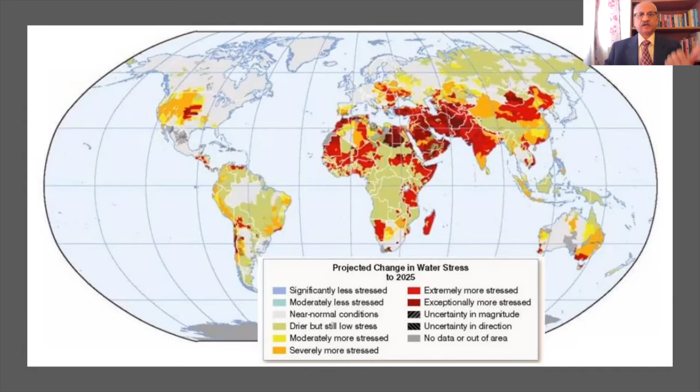Now, look at this picture. If you look at just 10 countries in the world, they account for 60% of the world population, and they don't have access to clean water. And now the biggest problem is going to be for India, especially the Indian subcontinent, for India, Pakistan, and other South Asian countries. So at the same time, if you look at the cities, the global cities which are facing this water shortage, you can see this started...

Once we identified the problem with Cape Town. So Cape Town was in the news a few years ago, and now there are other cities in the world which are also facing a similar situation, and unless and until we take some serious steps to address this, it is going to be a difficult situation. And one of the cities identified is also London.

So we need to address one of the areas where we can work, which is addressing this wastewater recycling for augmenting freshwater supply. Now, when it comes to wastewater recycling, we cannot ignore the energy water nexus.

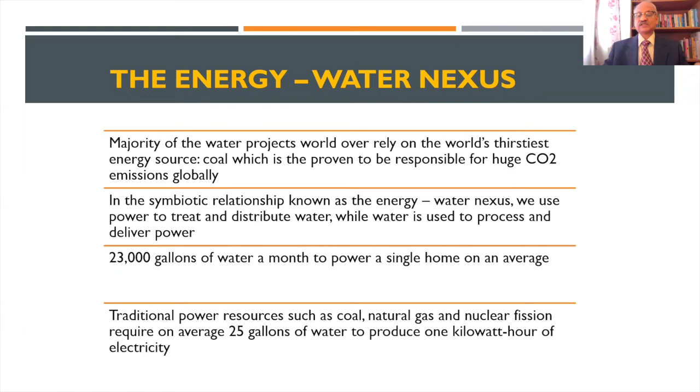Now the coal plants top the list, and they withdraw anywhere between 20 to 60 gallons of water per kilowatt hour. So the typical American home uses 900 kilowatt hours of electricity, which translates into nearly 23,000 gallons of water.

So it is time to look at the energy water nexus as well, because what is happening is the industries, especially the heavy industries like power stations, steel industries, and other large industries, mining industries especially, are competing for water with communities. So they are coming into conflict with the communities for accessing water. And at the same time, they are also causing heavy pollution of the wastewater they are generating, which is not treated to standards.

On the other hand, even though in Europe we have started the decommissioning of the coal-fired power plants, there is still an issue to be addressed there. So what we are doing is we are trying to repurpose the coal-fired power plants by switching over to gas-fired power plants or renewable energy power plants.

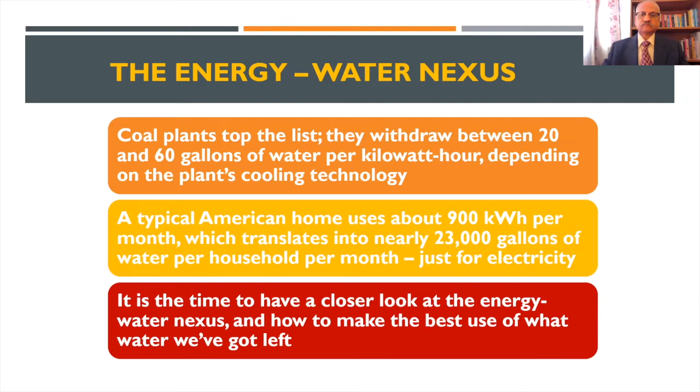But we are not addressing the pollution already caused by these coal-fired power plants, because they cause enormous damage to the environment over time. So look at this example of what these coal-fired power plants and coal mines are causing in developing countries.

I mean, the river is completely dead. It has no life at all. This was mainly caused because the state has an enormous number of coal mines, coal power stations, coal-fired power stations, as well as steel industries who are responsible for this pollution. And this is irreparable damage the industries have caused, and it is irreversible. It is going to take hundreds of years to restore this river.

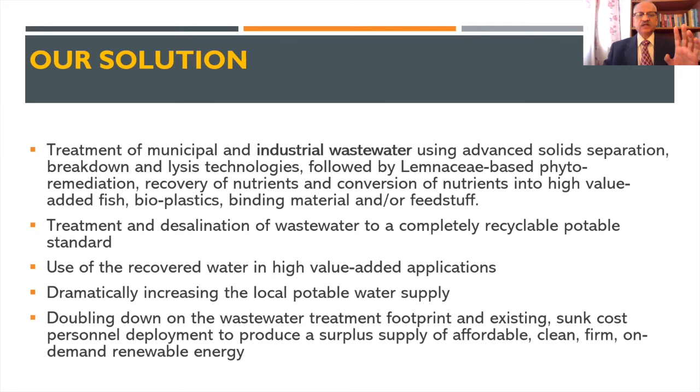It is nature-based. Now what are the problems we are addressing in our solution? If you look at this solution we are proposing, it follows the circular economy principles.

I can even say confidently that this solution is a typical example of circularity in water, which is very important. We address a number of problems: wastewater recycling for reuse, nutrient, energy, and water losses. We try to create long-term water security, food security and nutrition, prevention of water and soil pollution, and climate change mitigation solutions. If you look at the solution we are providing, it is not a simple wastewater recycling solution.

It is a wider climate change mitigation solution, because the plant, the Lemnaceae, which we are using, the vascular plant, is one of the fastest growing plants in the world. So in the process, it is sequestering enormous CO2. We are producing high quality superfood, we are producing renewable energy, and this solution recovers all the water for reuse. So it is basically a climate change mitigation solution, and not a wastewater recycling solution at all.

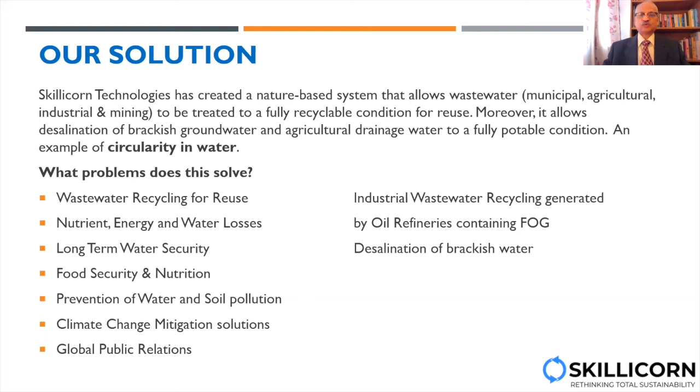We also desalinate the brackish water, as I will explain. Now, this is the plant. We think this is the plant for the future, because it can address a number of the challenges we are facing now. Its botanical name is Lemnaceae, and the common name is duckweed.

The duckweed is a common plant, and it is seen as a weed. In summer you can see it in Regent's Park or in Hyde Park, in the ponds there, in the water bodies there, flourishing. So this is available internationally, but this is one plant that has not been exploited by us.

They are small aquatic plants, floating aquatic plants, small in size, but they grow very rapidly. They grow twice in size within 24 to 72 hours under ideal conditions, so the biomass doubles in 2 days' time. And this plant contains leaves.

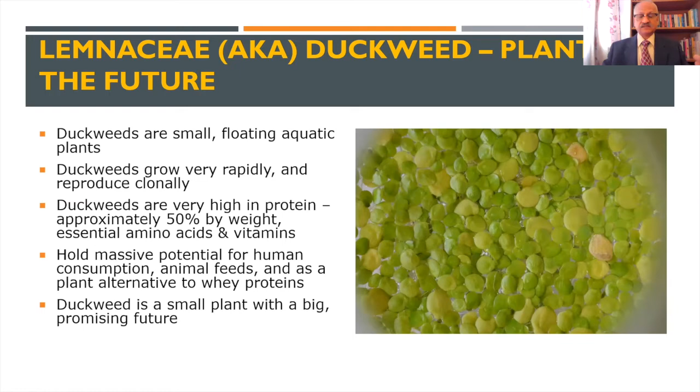They contain up to 50% protein by weight. There is no other plant source which can match Lemnaceae in terms of its protein content. They hold massive potential for human consumption, for animal feed, as well as the plant alternative to whey proteins. Research is also going on for using it for producing biofuel. So this is a small plant, but with a promising future.

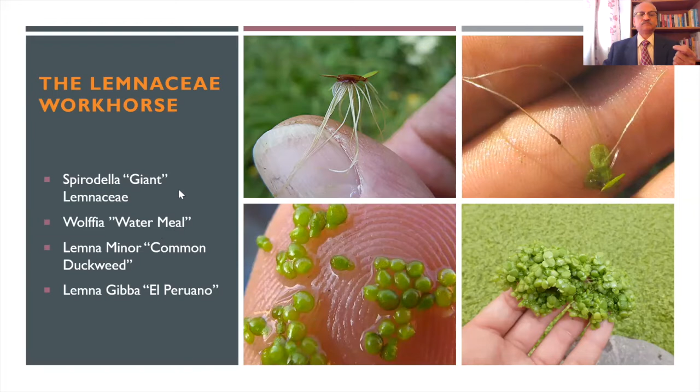So this is exactly, you can see this single plant here. It's a floating vascular plant, fast growing. There are different species of Lemnaceae which are used for this purpose. Now, coming back to the solution.

In the lagoons, we introduce Lemnaceae, so the Lemnaceae then does the treatment process, in different phases. In the case of municipal wastewater, the municipal wastewater contains more nutrients and less of toxic chemicals or heavy metals, unlike industrial water or mining wastewater, which contains almost no energy and also less nutrients, but more toxic chemicals and heavy metals.

That is why I mentioned in the beginning that our sweet spot is municipal wastewater, food processing waste, agriculture wastewater, which all contain these nutrients as well as the energy. Once the process is over, we use a series of lagoons. First, we strip the nutrients, and the Lemnaceae picks up all the nutrients and it grows.

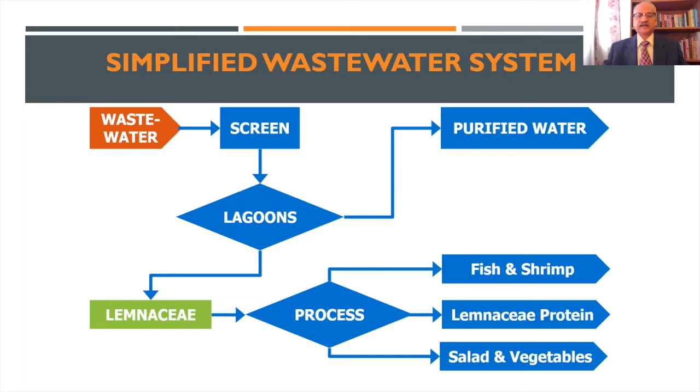You may be wondering how the engineered lumber and bioplastics come into this. What happens is, wherever the Lemnaceae is used, it extracts all the nutrients and is edible. But wherever it absorbs toxic chemicals and heavy metals, it is not edible. So we convert those into bioplastics or engineered lumber, taking them for alternative uses.

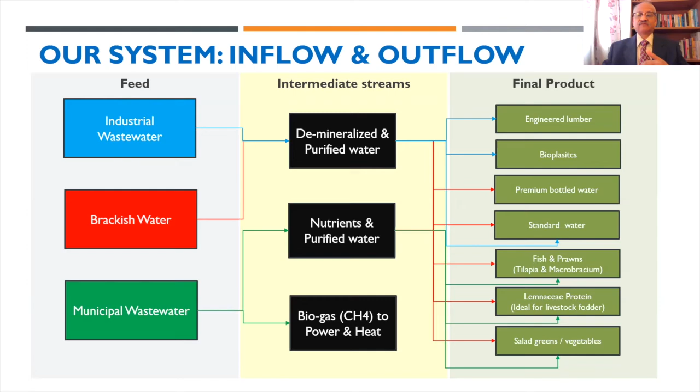So this is another diagram which explains this system. I'll quickly run through this because I'm mindful of the time.

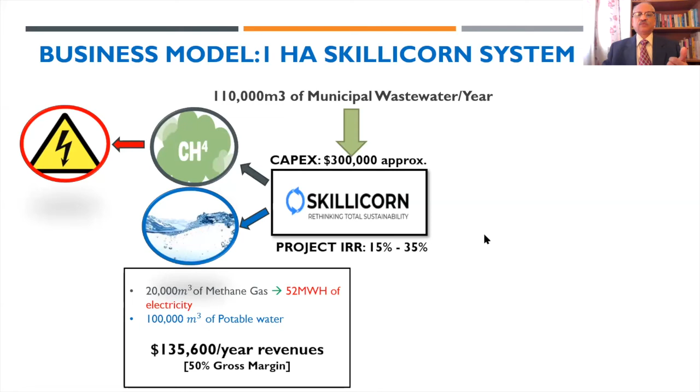Now, what is the business model here? Look, a 1 hectare Skillicorn system treats 110,000 cubic meters of municipal wastewater in 1 year. The capex is around $300,000 US, and the project IRR is 15 to 35%, depending on the composition of the wastewater. The outputs are methane, water, and lemnaceae, which is monetized into prawns and fish.

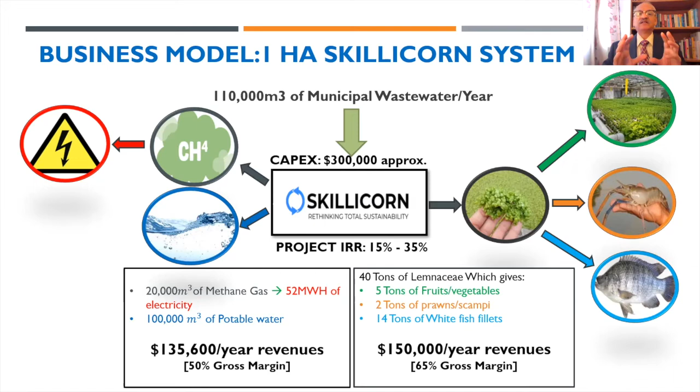This is the value of the methane gas we generate in terms of electricity, the potable water we produce, and also the fruits, vegetables, and fish fillets we generate. So this is the economics - this is the compelling business case that can be built on a nature-based solution like what we are discussing.

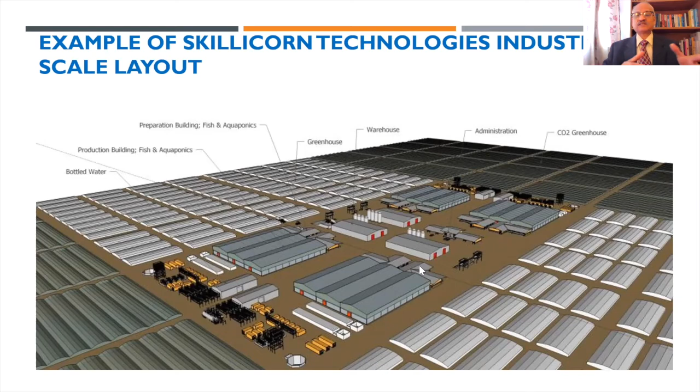So this is a layout of a commercial scale project. You can see the greenhouses for growing lemnaceae, the lagoons here, and also the factories for processing and growing fish - everything.

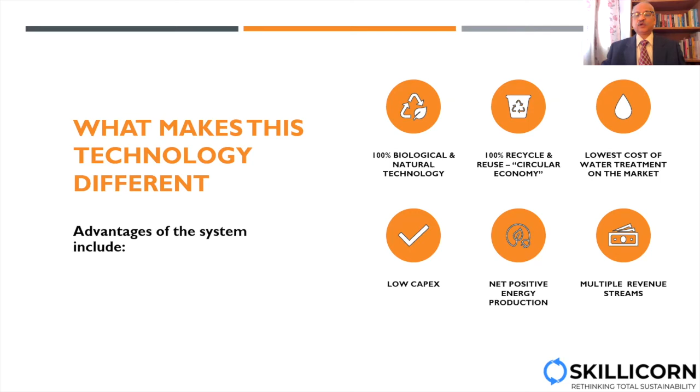Now, what makes our technology so different? It's 100% biological, natural, and follows circular economy principles - lowest cost of water treatment, low capex, net positive energy production, and multiple revenue streams. I could go on about the benefits, but I'm mindful of the time.

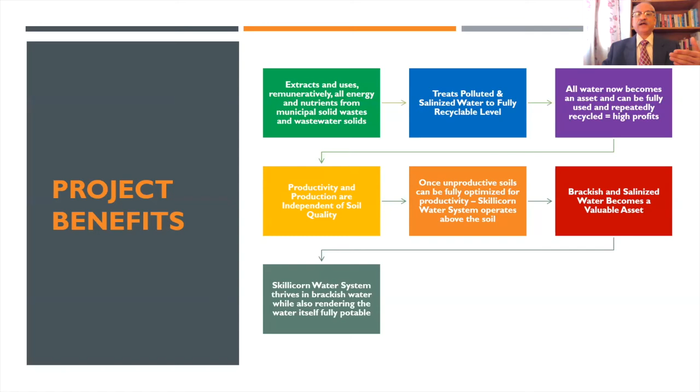So I'm just skipping these slides. Specifically, what we can offer for the livestock industry, which is blamed as one of the major polluters of our rivers and other water bodies - this is a serious problem, but you cannot blame the farmers because they are struggling for survival, with thin margins.

So we can't expect them to invest in wastewater treatment plants. But the solutions we have will help them because there's a business case - they can not only address the waste slurry issues they face, but also generate extra cash for their survival. These are the various benefits we can create for the livestock industry.

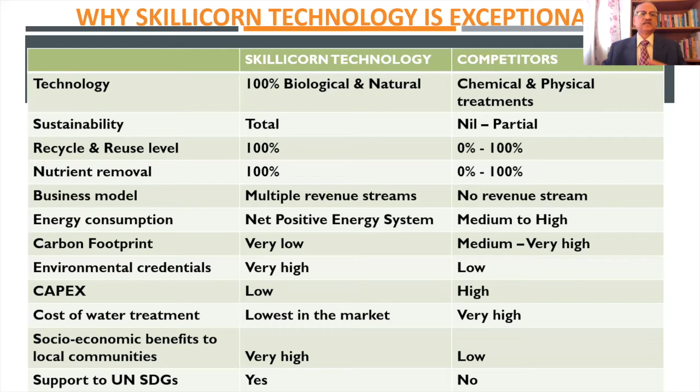This is a comparison of our technology versus competitors' technology in the marketplace. The slides will be made available to you later, so I'm just quickly running through this. It ticks all the boxes.

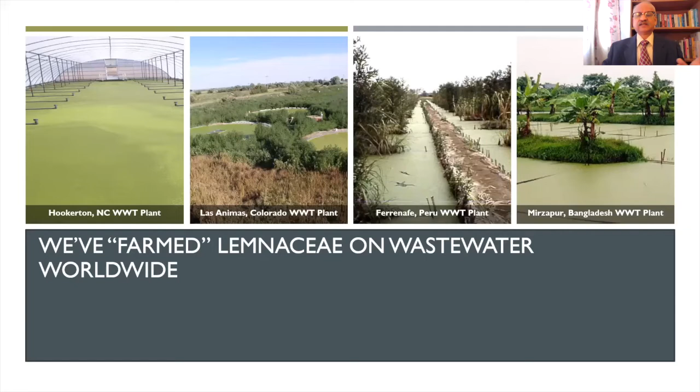But you may be wondering, it is all too good to be true. Yes, there are some limitations which we will discuss in the Q&A. We have done this internationally in different geographies and climatic conditions, so we know how this solution works.

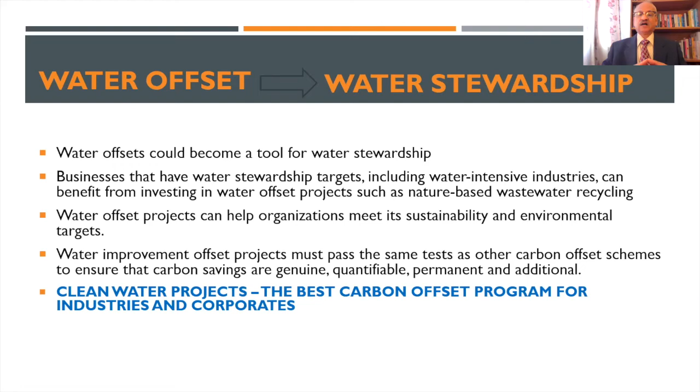So water offset or water stewardship is an evolving concept, and clean water projects like what we're proposing using our nature-based solutions are the best carbon offset programs for industries and corporates.

I'd like to close by saying that every $1 invested in water and sanitation globally will deliver 400% returns in reduced healthcare costs worldwide. I don't think I need to explain or emphasize this point - this is the WHO's statement. This is the reason we should pay more attention to recycling wastewater using sustainable technologies or nature-based solutions which are eco-friendly.

Okay, thank you very much for that, Manny. I've got a couple of questions myself. The first one you partly answered - I was going to ask whereabouts have you got installations, you showed the world picture. Are there any installations or projects you've got going on in the UK or Europe?

No. See, what we did was we have done pilot projects all over the world. Originally, when we started 30 years ago, we used this NGO model because World Bank, ADB, and other donors were financing our projects. We did it in different places, especially in Peru, Bangladesh, India, and other places financed by different donors. So what we did was we engaged local partners.